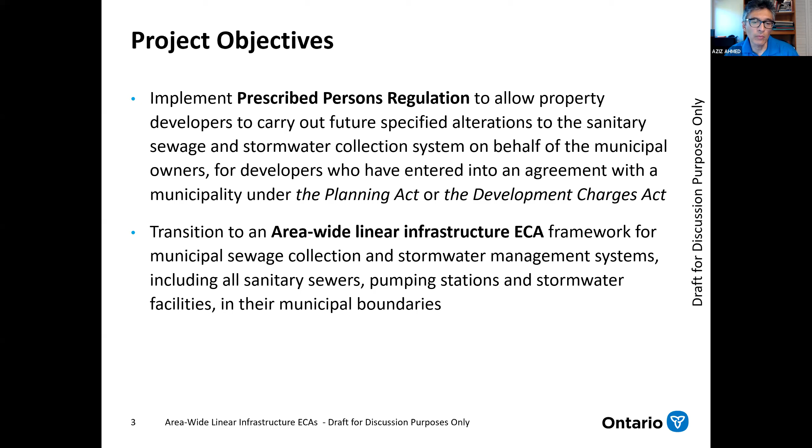The next thing we want to do is transition to a consolidated permissions framework. We call it the area-wide linear infrastructure, and this ECA would cover all of a municipality's sewage collection system in one ECA, and all of its stormwater management systems in another ECA, including all of those components located within a municipality's boundaries.

So we started working with a technical working group in 2018, composed of municipalities, major consultants, industry organizations, and ministry staff. At this time, we were really trying to consult about two things: design criteria for our most frequent ECAs that we saw applications for, which is the pipes, and wanting to move towards this consolidated permissions framework instead of the pipe by pipe, piece by piece approvals that we do now.

Fortunately, the ability of the ministry to authorize works into the future is already allowed by the Environmental Protection Act. Section 20.6 of the EPA allows the director to put terms and conditions having to do with future specified alterations in an ECA. That refers to alterations carried out by the owner of the ECA. It also allowed for alterations, extensions, etc., that are carried out by persons prescribed by regulations.

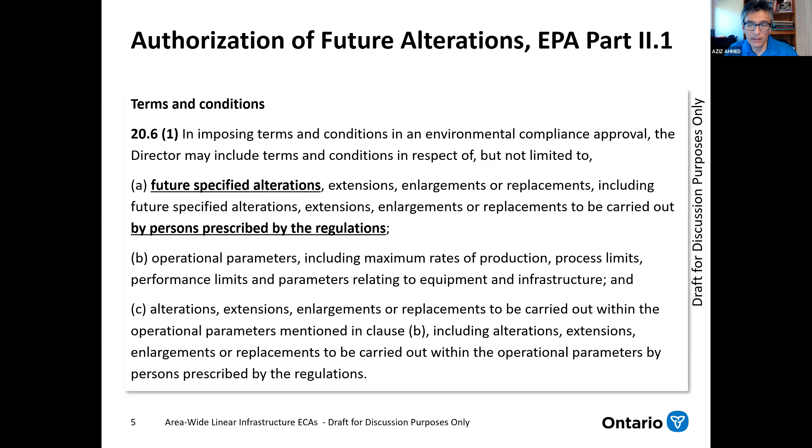And the persons prescribed by regulation were not in place until last year, even though this authority existed since 2012.

So the prescribed persons regulation, it's actually called the Environmental Compliance Approval in respect to sewage works. It was passed last year, and its purpose is to streamline the approvals requirements for constructing sanitary sewage collection and stormwater management systems, specifically that a municipality either owns or will own.

So prescribed persons such as developers can construct works under a municipality's ECA if they meet specific conditions, in which case they don't have to obtain their own ECA for that. The specific conditions are: one, meeting the sewer and force main design criteria, which is a ministry-developed document; and two, the owner complying with the conditions of pre-authorization that are in the ECA.

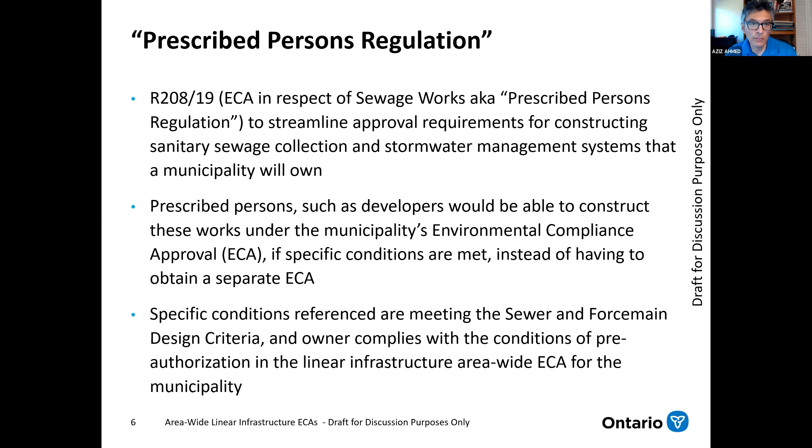So this area-wide or consolidated permission is modeled after what we already do in the municipal drinking water licensing program. For all of you in the industry, it's highly unlikely you have applied for an ECA for water distribution, like water mains, unless these are very large water mains. Those are all pre-authorized as part of the license.

We want to move towards this consolidated framework now for sewage collection and stormwater management. Some of you may be involved in the Municipal Transfer of Review program. This is a delegation of the ministry's review responsibility to some of our municipal partners, where they do the technical review on behalf of the ministry for developer-related applications, and recommend these to the ministry, which approves them without further technical review.

Another form of consolidated permission we've been issuing is a wastewater system-wide pilot. About 10 municipalities have these. Essentially, this is a consolidated permission for sewage collection and stormwater management works. Some essential features of this framework: it's a single permission for all interconnected works with the same owner, or works within the same municipality.

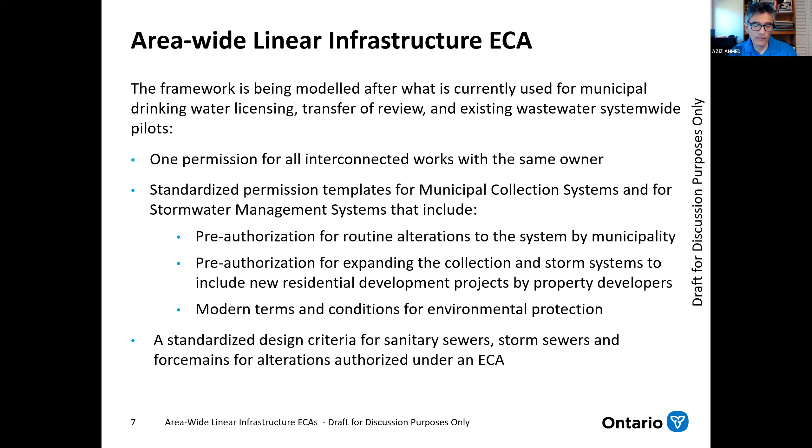Very importantly for us, it modernizes the terms and conditions for environmental protection from what's in ECAs right now, some of which date back to 1970, modernizing all of them collectively. To do this, it relies on standardized design criteria for the pipes, which would be pre-authorized if the design follows those requirements as conditions in the ECA.

The Prescribed Persons Regulation 208 is one of the key enablers we have, and it allows a developer who has an agreement with the municipality under the Planning Act or Development Charges Act to construct works that extend a municipality's infrastructure. The second enabler is this design standard for the pipes.

Now, both of these things by themselves don't do anything. But once incorporated into the conditions of the linear ECA, they become effective in the sense that this consolidated permission includes all of a municipality's own works, whether sewage collection pipes, pumping stations, et cetera, or stormwater management systems — all the pipes, the ponds, the LIDs, everything else that forms part of a municipality's stormwater system.

Specifically, the Prescribed Persons Regulation and the design criteria feed into a schedule in this proposed ECA, where the director has conditions which authorize either the municipality or these prescribed persons, who are property developers, to carry out alterations to the municipality's infrastructure. This allows us to avoid issuing about 700 to 800 approvals for property development related sewage works and stormwater management every year.

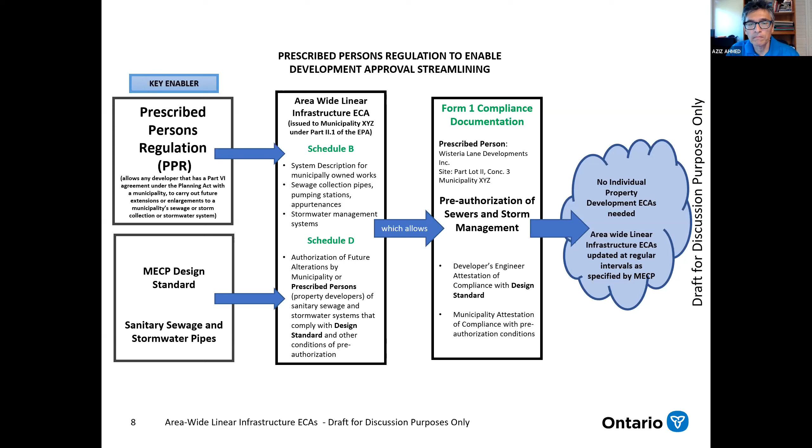The ministry would require that every regular time period, let's say 5 years, this linear ECA is updated through an application so that the terms and conditions are always kept up to date with our most modern environmental protection requirements. So the framework, as I mentioned, is very similar to municipal drinking water.

Take municipal drinking water — let's say the City of Toronto has one license and one permit for their entire system, which includes the intake, 4 major water treatment plants, and 5,000 kilometers of water mains within their boundaries. This potable water goes into residential developments, commercial and institutional buildings, and then some part of it comes out as sanitary sewage.

These developments, roads, etc., also generate stormwater. So our goal is that instead of the many thousands of approvals that may cover these works, we would have, again just like on the drinking water side, a single municipal sewage collection ECA and a single stormwater management ECA. The wastewater treatment plant would remain outside this consolidated permissions approach.

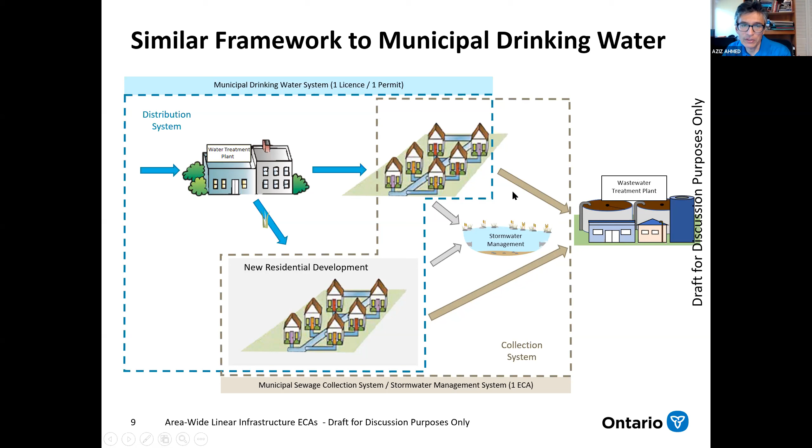So again, our approvals framework is fragmented. It's fragmented in terms of project by project, pipe by pipe. There's no really holistic way for us to view what the infrastructure is doing. City of Toronto, for instance, has 4,000 approvals we've issued to them.

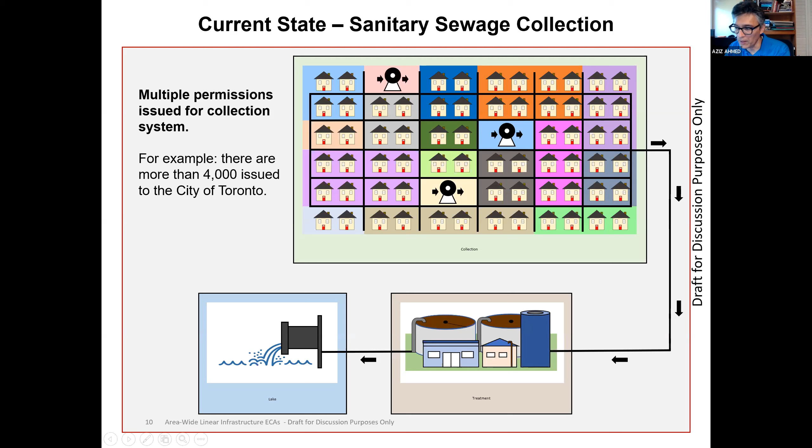So what we want to do is transition into this state where there's a single permission for the entire sewage collection system and one for the stormwater management system. And again, it's for the collection system only. The treatment plant and the outfall remain outside this framework.

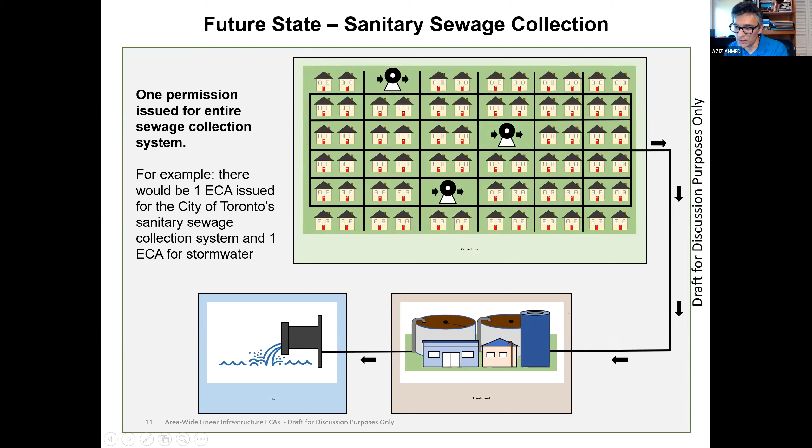And further, another way in which our approvals are fragmented is by media. So the Sewage Works approval includes wastewater and stormwater. Municipal sewage collection system has air emissions associated with it through odor control facilities, emergency generators, etc. Those are all covered in separate air and noise approvals. We want to include all of these things, regardless of media, into a single multimedia approval.

On the stormwater management side, there's really no air emissions, but there's waste generated. There's waste residuals from storm pond sediment from the collection system. We want to provide, within the authority of the ECA, the ability to dewater, physically process, and beneficially reuse the sediment, and perhaps deal with some of the generated process water by recycling that back up into the system.

An example: the Ministry of Transportation had a single pond project up at Mavis and 401. They were cleaning out the pond. The disposal cost for that sediment was going to be $2 million just for one pond.

We were able to work with them through a systems ECA, whereby they were able to reuse that sediment at a road project at Dixie and 401 to build noise berms. So again, a significant saving of taxpayer dollars, as well as a beneficial reuse of the material.

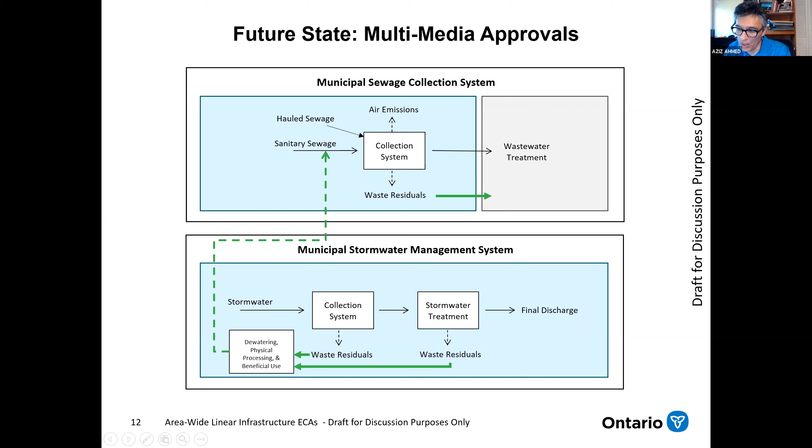And just to highlight, in that case, they weren't meeting the criteria in Table 1 of the excess soils regulation. We were able, through the ECA, to find this other way of dealing with that sediment.

Okay, so the design criteria, just to overview this, it covers sanitary sewers, force mains, storm sewers, and what we call third pipes. This establishes the minimum design requirements for an alteration to the conveyance system or the stormwater management system as one of the conditions they would have to satisfy to have these considered, as I said, pre-approved or pre-authorized.

If it's undertaken in accordance with the ECA and the design criteria, then no separate approval from the ministry is required because they're pre-approved. The difference between the design criteria and our existing wastewater system guidelines is that the design criteria is written in unambiguous compliance language as opposed to guideline language, and it makes it easier for consultants and designers to ascertain whether they comply with the requirements.

And municipalities can adopt standards that are higher than those in the design criteria. So this design criteria forms the floor, as it were, of the design.

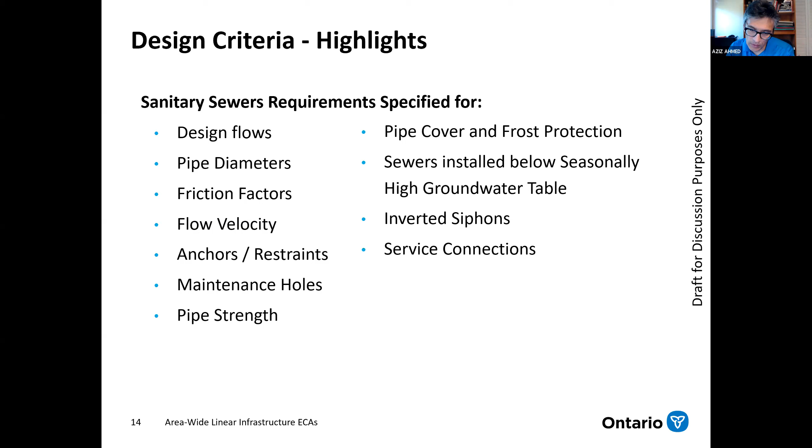Some of the things that the design criteria cover for sanitary sewers are design flows, friction factors, slopes, pipe cover, service connections - fairly standard design things, but again written in more detail to allow a designer to ascertain compliance.

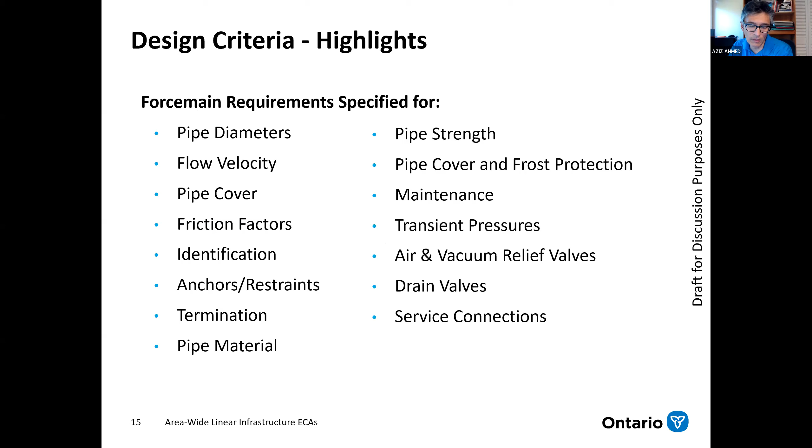And again, for force mains: flow velocities, friction factors, anchors and restraints, transient pressures. Those are some of the design criteria that are covered. I should add the full design criteria document is posted on the EBR registry, and I will provide you information at the end of this on where to access that.

And again, for storm sewers, different things like how to calculate the runoff, the pipe sizing, need for maintenance holes, inverted siphons, etc.

The design criteria also cover combined sewers, in the sense that while you can't install new combined sewers, we have pre-authorized the rehabilitation of existing combined sewers, as well as providing for the construction of CSO detention facilities of a certain size.

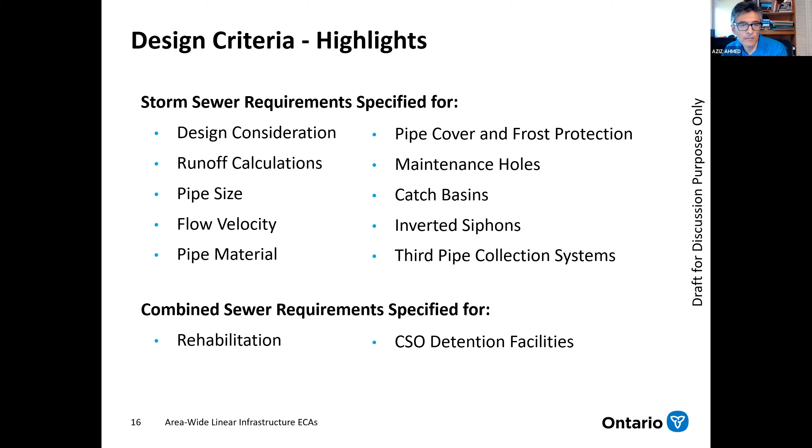One very important criteria that was brought to the attention of the ministry by the regional public works commissioners was the incidence of low or inadequate quality construction causing significant inflow and infiltration into sanitary sewers, eating up capacity at the sewage treatment plant, and causing environmental overflows into our water bodies.

Inspection and testing requirements have now been made mandatory for any pre-authorized work. There will be mandatory post-construction inspection and testing requirements with the goal primarily of reducing inflow and infiltration. Some of the requirements include mandatory video inspection of all new sewers and appurtenances, leak testing of sewers and force mains, mandatory deflection testing, and ensuring that if sewage and water infrastructure are located in close proximity, additional testing is done.

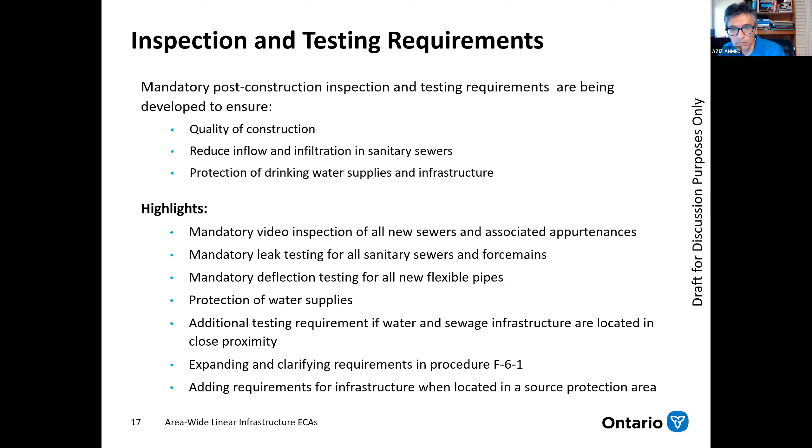So right now, if you get ECAs, this is an overview of what the new ECAs would look like. The ECA would be based on schedules. It looks like municipal drinking water licenses or permits, for those of you who are familiar with that.

There will be system information, like the boilerplate information about the system owner. Then there would be the system description of all the works that are in the ground, commissioned, and working for a municipality, whether they were constructed with or without an approval. Schedule D would have the conditions of pre-authorization, and Schedule E would have the operating conditions for that municipal sanitary sewage or stormwater collection system, and Schedule F will deal with residue management, which is the management of solid waste from that system.

If the works are not exempt from approval or not pre-authorized, in the future, instead of issuing separate ECAs for these, they would be issued as a schedule to the existing municipal ECA. This is the Schedule C document, which would authorize alterations that aren't pre-authorized, and it would form part of this, so that we would not issue the 10-digit ECA numbers as we do now. You would have one ECA number, highlighted there, that always remains the same. We think that'll make it much easier for record keeping purposes.

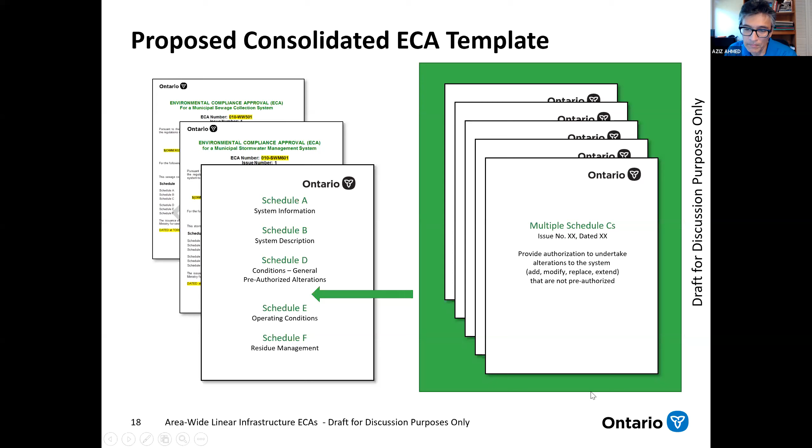In terms of system alterations, right now, if you have a new project that's not exempt, it needs to get an ECA. In the future, with this new framework in place, you'll ask: is it pre-authorized through a condition of an ECA? If it's not, you will apply for an amendment. There'll be a technical review, just as it's done right now. You will not receive a new ECA, you'll receive the Schedule C. Then you undertake the alterations, and then notify the director of completion through a ministry provided form. And then you're done. If there's a need to modify the description of the ECA, you'll receive that at some point in the future.

With pre-authorization, you now have a new path: you ask yourself, is this pre-authorized? If it is, then you complete a ministry supplied form for your records and undertake the alterations in accordance with the conditions of the ECA. If it changes the description of the system in the ECA, you notify the director again using a ministry supplied form, and then you're done and back at the same place. This ECA will be updated, the consolidated ECA, at least once every 5 years.

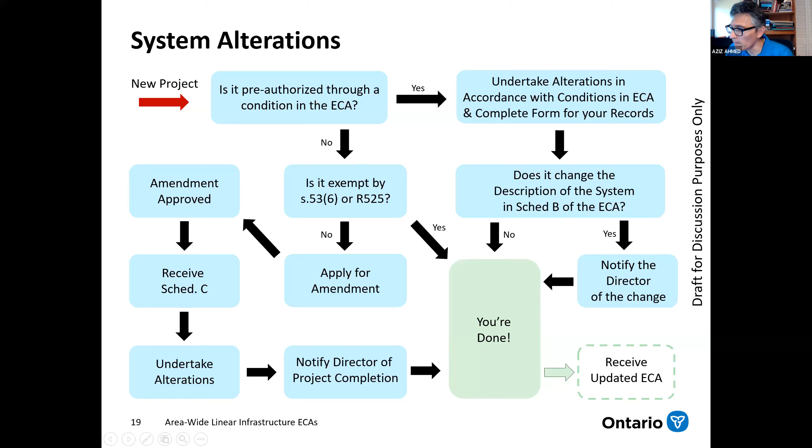Okay, so again, the ECA templates in general, I won't belabor this because you can go and take a look at the templates in detail on the EBR registry. But here are the standard requirements that they will have. It's very similar to current ECAs, except you have to remember now it applies—there's one ECA for an entire municipality, and these requirements apply to all of them.

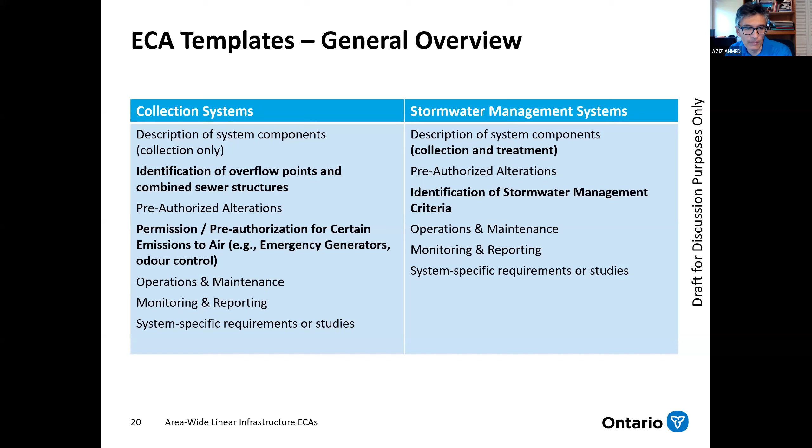Again, some of the key highlights of the collection system ECA: it describes all of the components that are in the ground owned by a municipality, or for which the municipality is the beneficial owner, in the sense that the works are going to be built and transferred to their ownership. It describes all system components and references a separate document, basically a schematic of all the sewers, as well as the pumping stations and storage tanks that are part of that collection system. It specifically identifies overflow points and combined sewer structures.

The pre-authorization conditions allow for the alteration or extension of sewers and force mains. It also allows for like-for-like replacement of existing combined sewers based upon having a pollution prevention control plan. It also has its multimedia, including equipment with emissions to the air, etc.

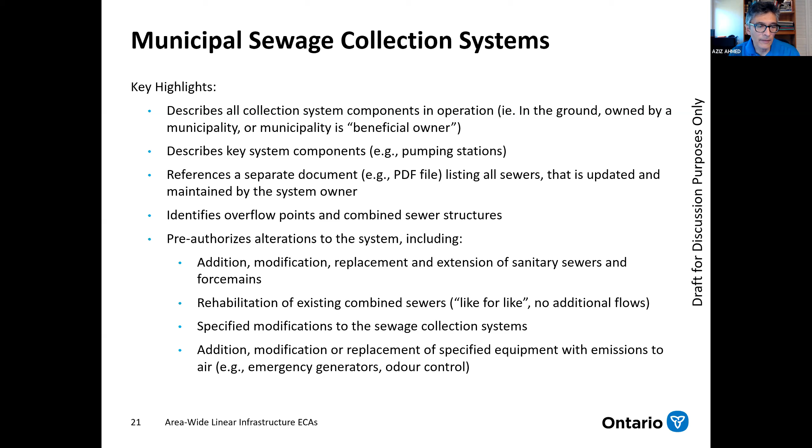I'll just move on to the sanitary, the municipal stormwater system. Again, it's the same kind of thing in terms of describing all of the stormwater infrastructure, aside from the very large regional flood control ponds.

It pre-authorizes alterations, which include storm sewers. It also includes really everything with regard to stormwater management, ponds, LIDs, green infrastructure, based on the conditions of the ECA. And you have to take a look at the ECA template to get more details about this.

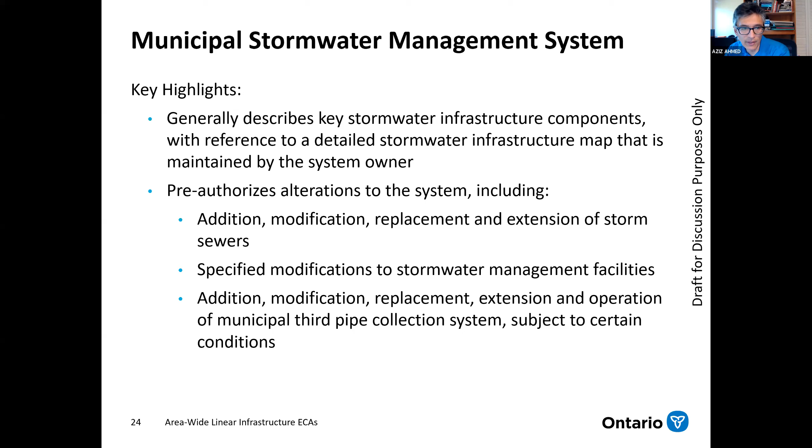It also talks about a third pipe system. These third pipe systems are essentially a communal system for the collection of relatively clean roof runoff or foundation drainage for the purposes of reuse primarily. Again, this is covered in the design criteria and the conditions of the ECA. So again, the third pipe is for reuse.

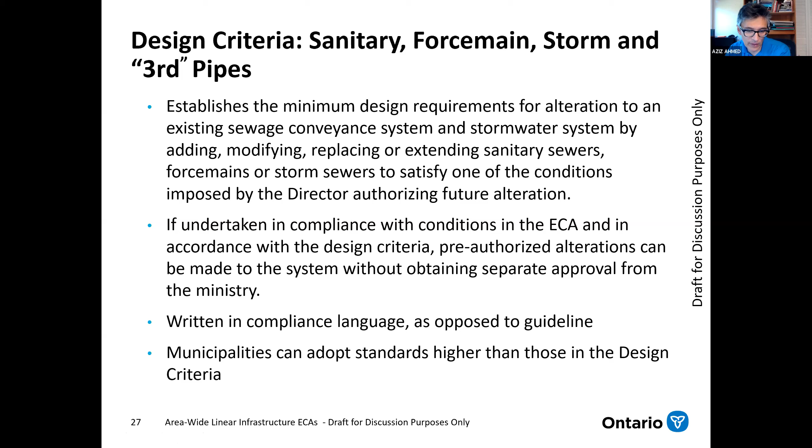I've mentioned that municipalities can adopt higher standards than those in the design criteria. Again, if the design doesn't meet the design criteria, it doesn't mean that it's unapprovable. It just means it's not pre-authorized. You need to get an ECA amendment for it, kind of like the way you get ECAs right now.

So in terms of the next steps and timing, there's an EBR consultation taking place on this proposal. That's the ERO reference number 019-1080. You can access this on the environmental registry and get all of the documents. The posting of this proposal closes on September 6th, so you still have time to get us comments.

If you're interested in commenting on the ECA template and the design criteria, we have line numbered versions of the templates and design criteria, and we're asking that you use the MS Word commenting feature to provide us comments, because it allows us to compile the comments in a reasonable period of time. That's the email address, mdwlp@ontario.ca, and you can request the line numbered version. If you don't want the line numbered versions, all of the documents can be found on the EBR posting.

And with that, that's my name and contact information. I'll ask Enrico whether we should stop to take questions on this right now, or if I should launch into the Watermain Disinfection Procedure.

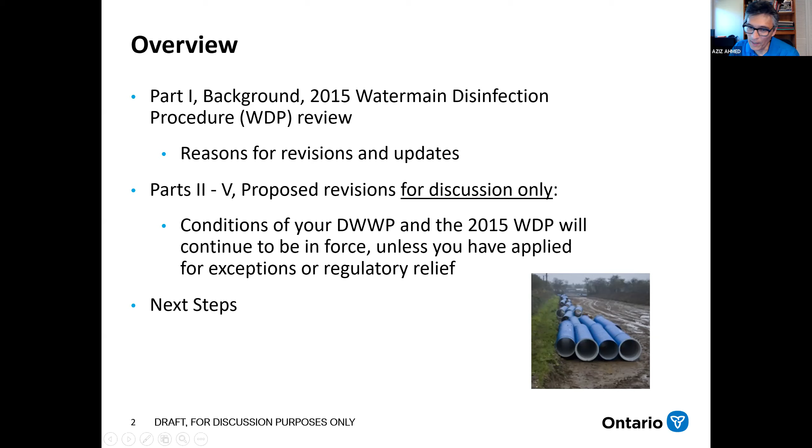For those of you who don't do a lot of work in the water main break world, this was one of those things that was a bit of a best management practice prior to the issuance of the first licenses and permits in 2008. After that time, compliance with the AWWA standard C651 became a mandatory condition of the municipal drinking water license.

One of the problems we had was that the document was very ambiguous in terms of being able to be used as a compliance document, and there were things in there that just kind of tended to contradict each other. So we were fortunate at the time, shortly after we issued the licenses and permits, that we became aware of this Water Research Foundation Project 4307.

It was led by Greg Kirmeyer and Mark LeChevallier, in which they basically looked at the risk factors of various types of water main breaks, and they worked with 29 American and 1 UK utility to come up with these. They were looking to see what risk factors can be used to determine public health risks, and they categorize risks into type 1s, which have the least potential for contaminating a water supply, all the way up to type 4 where there's a risk of contaminant intrusion. Happily, the procedures in type 1, 2, and 3 were almost identical in terms of response.

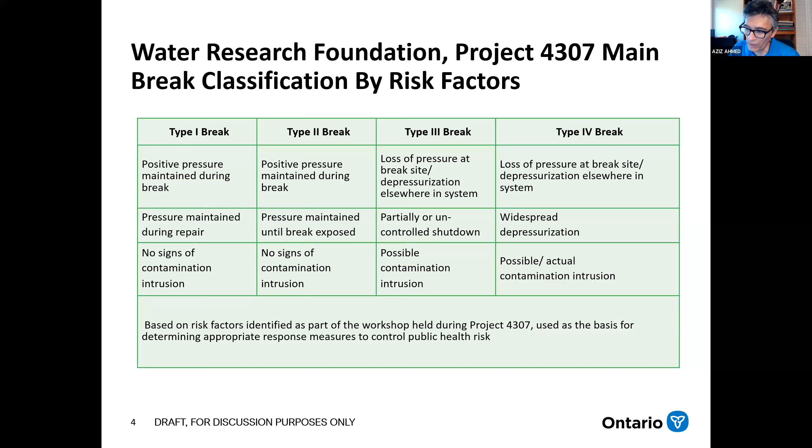So we were able to actually do a refinement to that when we implemented our version of C651 for Ontario system owners. The focus of the 2015 Watermain Disinfection Procedure, AWWA C651, deals with

installation or routine installation of water mains, as well as emergency repairs for breaks. So really the focus of our 2015 document was with regards to main breaks, and so we came up with our own categorization of water main breaks based on the risk of contamination.

There was a requirement that an operator in charge be there at the break to determine the category and document their reasons. It has procedures for agency notification and reporting, observations of improper disinfection, as is required under the Safe Drinking Water Act, Schedule 16.

There were also water main break procedures, which regardless of the type of break needed to be followed, and then obviously documentation of the break, for future inspection purposes.

One of the things we realized early on is that if the water main remained pressurized during the break and throughout the excavation until pressure was reduced, it's highly unlikely that potentially contaminated water was directed to users. That was very helpful for a lot of public health units as well as ministry staff.

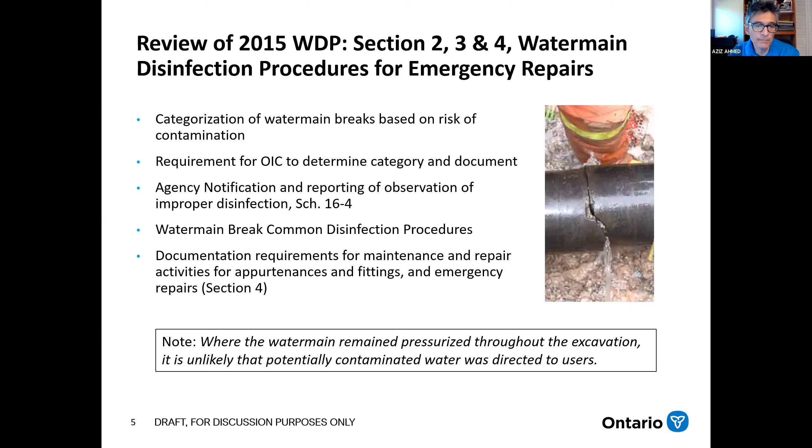So in our 2015 document, we categorized main breaks based on risk of contamination, both before and after flow reduction. Category 1: there's no evident or suspected contamination. You can look at the picture on your right, and yep, certainly water's flowing out, but doesn't appear to be any contamination. Category 2: there is evident or suspected contamination. You can see there's a wide blowout there of that pipe, and we also categorized any repair that needed more than 6 meters of replaced pipe, more than one standard pipe length, as a category 2.

One of the things we did is make sure that it wasn't considered an observation of improper disinfection just because you had a water main break. Only if you had reason to believe that improperly disinfected water was distributed to users would the requirements for reporting and corrective actions under Regulation 170 be followed.

We also clarified that just because you have a main break, you don't automatically have to report that to the ministry. The only time you have to report it is if there's a water advisory that's been declared, or if it's a special case of contamination that's either chemical or sewage in nature. We also clarified that for Category 1 main breaks, microbiological samples were not necessary.

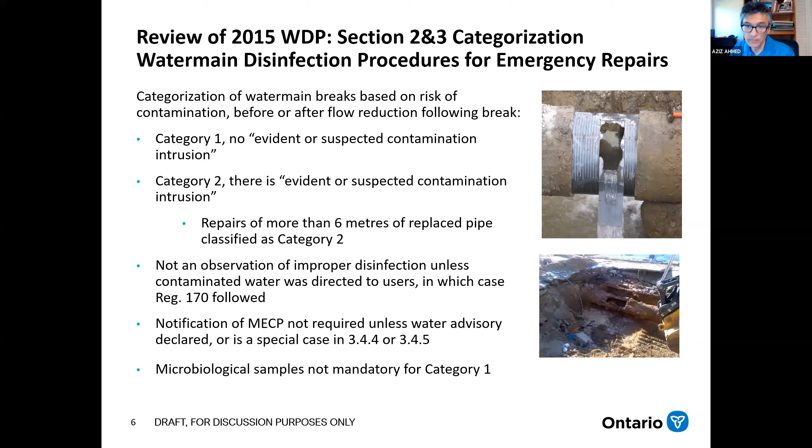After we issued the 2015 document, we received, up until about 2018, about 64 separate issues, requirements for clarification, or opportunities for identified changes to that document.

As I mentioned, the focus of the previous document was on water main breaks and emergency repairs. We did a pretty good job of covering those off, but the proposed revisions were more focused on new water main construction and replacement.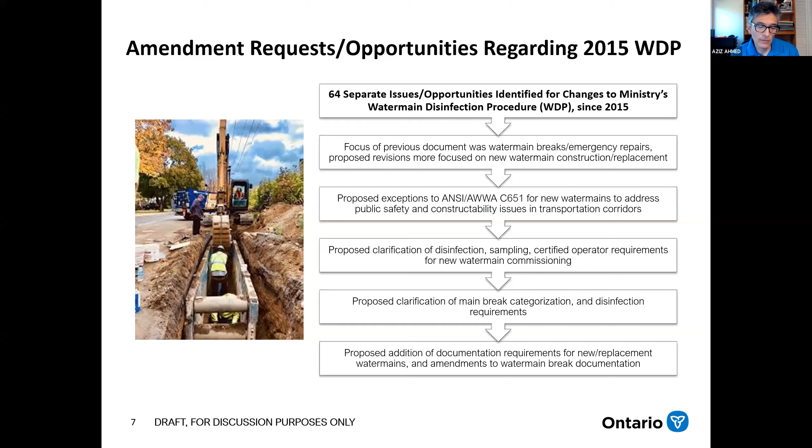There were also issues raised with regards to new water mains being constructed and where following C651 was causing public safety and constructability issues. There's proposed clarifications for the disinfection, sampling, certified operator requirements when commissioning new water mains. There was also requested clarification for some of the main break categorization and disinfection requirements, and of course the need to add additional documentation requirements.

I don't know if any of you had a chance to participate in our working group, but this group put together the 2015 document, and they were called back to help us revise this document again.

We don't have a lot of time, so I won't get into this in detail because the document is available for anybody who wants a copy of it.

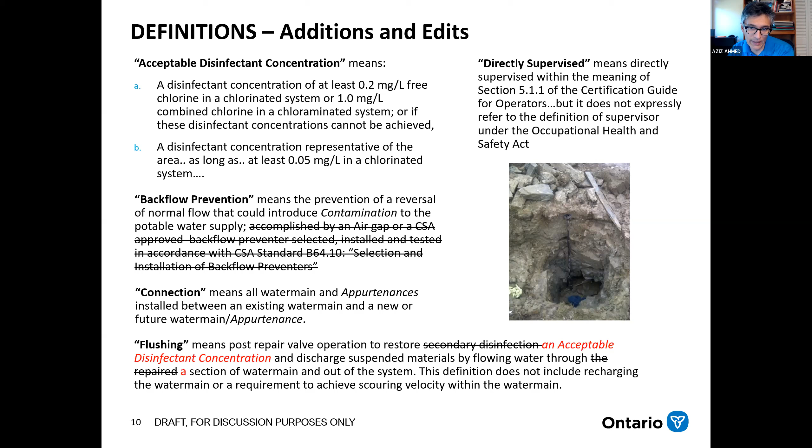We made certain changes to the existing definitions in the document, including clarifying what is an acceptable disinfectant concentration, redefining backflow prevention to clarify its requirements, defining connections, which we did not before, as well as defining flushing to clarify some of those requirements. And also addressing the issue of direct supervision for the purposes of our ECA, our license, and the requirements under the Occupational Health and Safety Act.

The standard C651 applies to all water main additions, replacements, extensions. It also applies to temporary water mains, and it applies to service pipes greater than or equal to 100 millimeters in diameter.

We provide certain exceptions: exceptions to backflow prevention in 4.8.9 of C651, exceptions to scouring velocities, and exceptions for disinfection procedures where water mains or service connections are crossing transportation corridors.

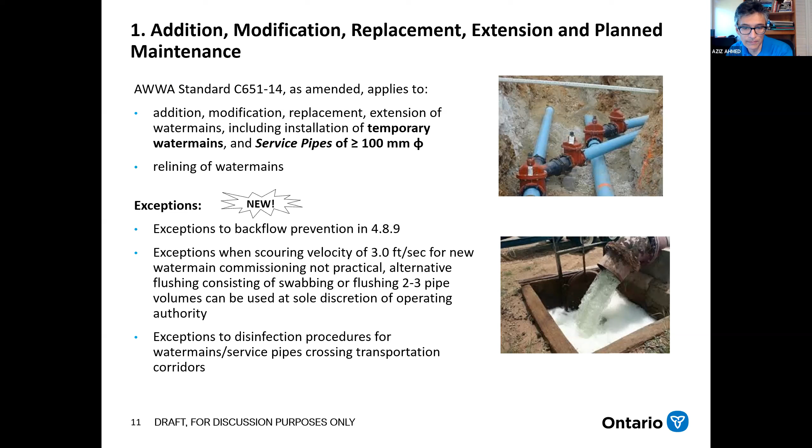There's now language in there about the use of hydrants to supply temporary water mains. That was, for some reason, something people thought couldn't be done. We've made sure that we have included language in there for that.

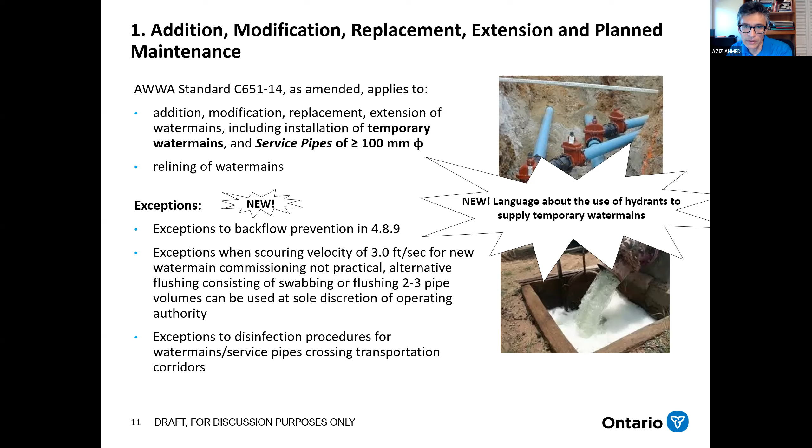Just one thing, please be aware that C651 requires that the new water main be isolated using physical separation until a satisfactory bacteriological testing result has been completed.

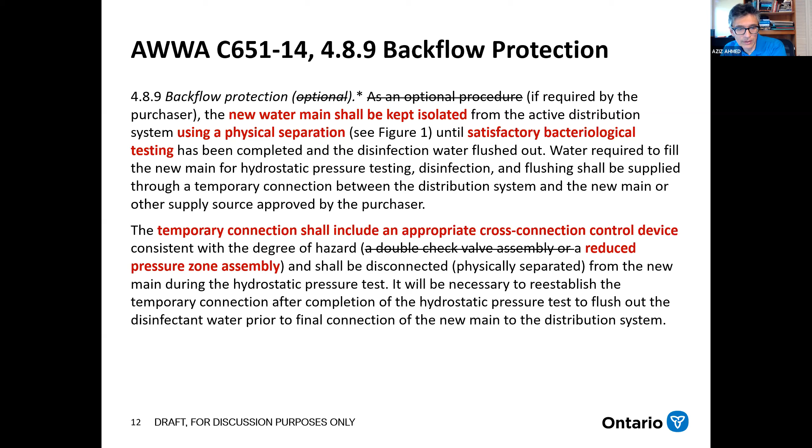The temporary connection has to include an appropriate cross-connection control device. In our case, we're not allowing double check valve assemblies anymore because they can't be tested on site. Only a reduced pressure zone assembly will be allowed.

So as I mentioned, backflow prevention is a requirement for installing new water mains, and the two recognized methods are air gaps and a reduced pressure backflow preventer.

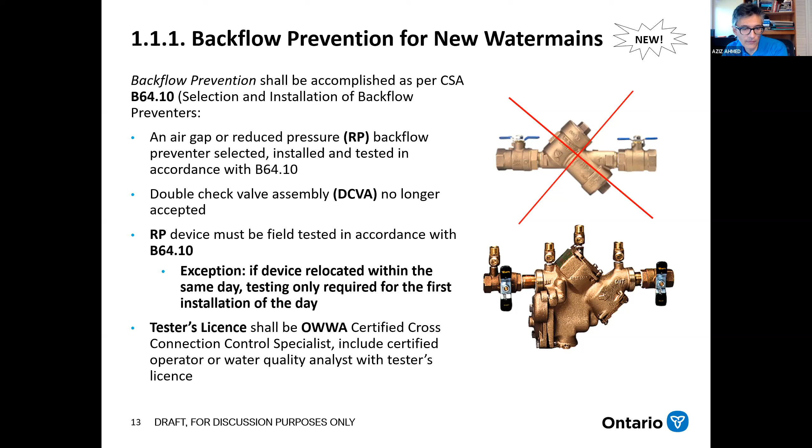And the RP device must be field tested in accordance with B64.10, at every site except for where the device is being relocated within the same day. And the tester's requirement is an OWWA certified cross-connection control specialist license.

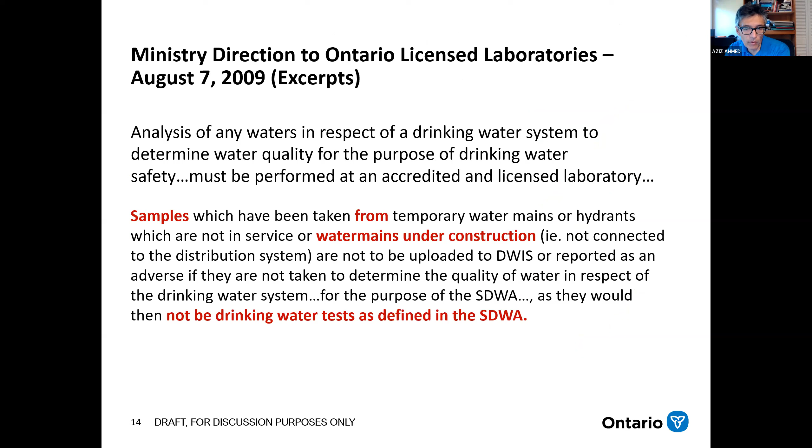One of the things that we clarified previously on August 7th is that samples taken from water mains under construction are not drinking water tests as defined under the SDWA. Therefore, you don't need to report these as adverse test results if they come back negative.

So there was microbiological samples for new water mains. Obviously this microsampling needs to be done, and it must be done at a licensed and accredited laboratory. Samples taken prior to final connection are not drinking water tests, and so they're not reportable.

We've clarified for connections to new water mains that we are providing exceptions in the case where these connections are more than one pipe length from some of the disinfection requirements. And backflow prevention measures within section 4.8.9 are not mandatory for connections.

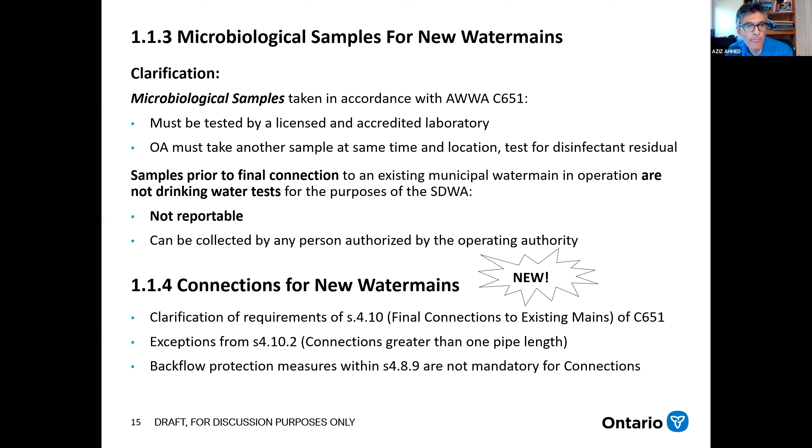So for final connections, for connections equal to or less than one pipe length, the disinfection procedure is that this may be spray disinfected or swabbed just before being installed, and if that's the case, that's acceptable.

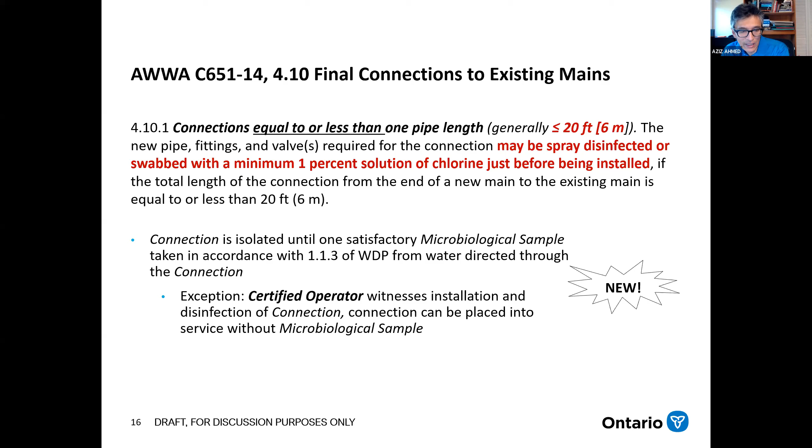One microsample has to be taken in accordance with the Watermain Disinfection Procedure. There's an exception where if the certified operator witnesses the installation and the disinfection, the connection can be placed into service without the microsample. For connections greater than pipe length, there's a very detailed procedure where this must be set up above ground, disinfected, and bacteriological samples taken.

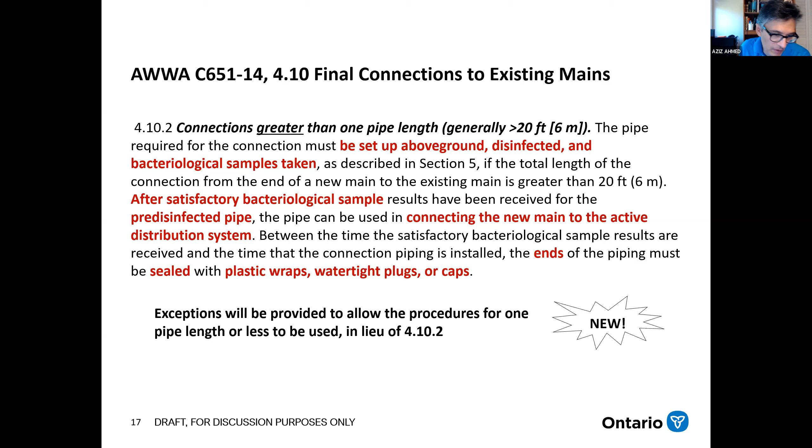And after satisfactory bacteriological samples have been obtained, then the entire assembly is lowered into the ground. This is quite onerous, especially when crossing transportation corridors, and so we've allowed for exceptions to this.

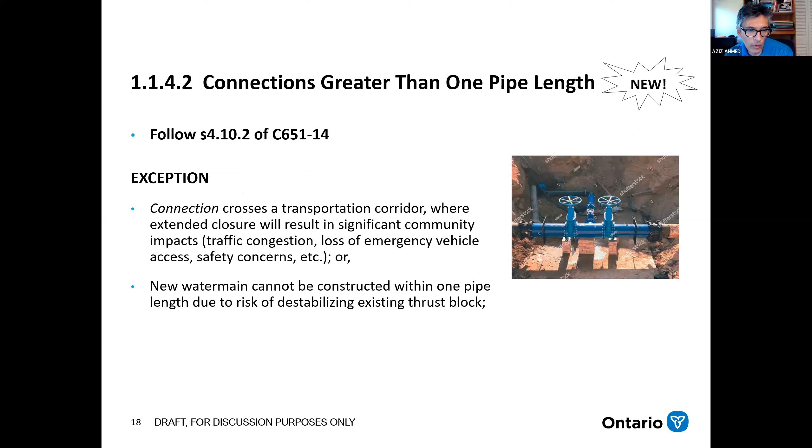The exception is that you can follow the procedure if it's greater than one pipe length, but if it's crossing a transportation corridor where the extended closure would result in significant community impacts, we would allow this water main to be disinfected using the procedures in 4.10-1, which is the one for single or less than one pipe length.

Connections greater than one pipe length, up to a total length of 40 meters, may be constructed within the excavation and disinfected similar to one pipe length if the following conditions are met: it's disinfected, spray disinfected, or swabbed, and a certified operator witnesses the installation.

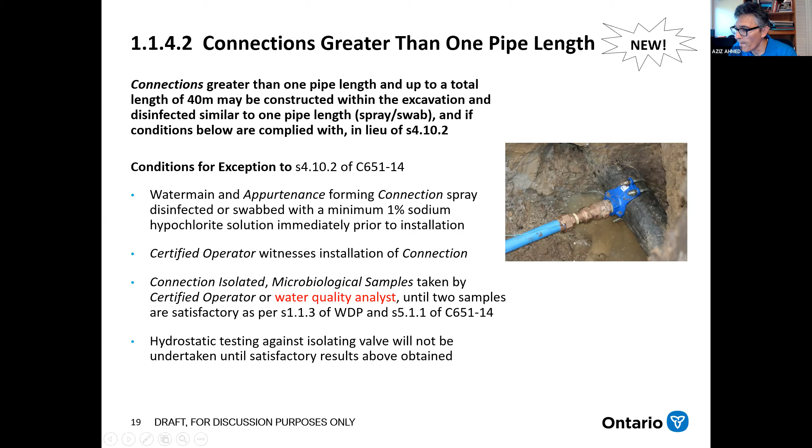So we have also included clarification of certified operator requirements.

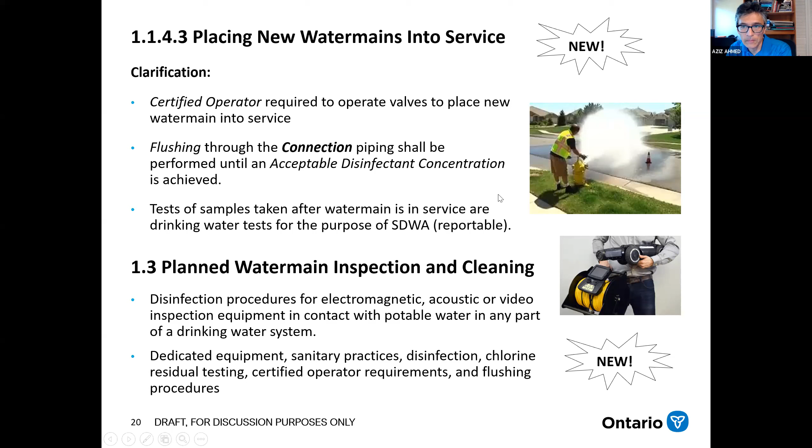We have a lot of inspection and cleaning of water mains that takes place. Some of the inspections happen while the water main is still in operation. So we have provided disinfection procedures for things like video inspection equipment that's in contact with potable water in the drinking water system.

We have also provided procedures for where an existing water main needs to be realigned on the spot, and what type of disinfection procedures need to be followed. Sometimes that's done when you're installing other infrastructure, like network equipment, gas mains, etc.

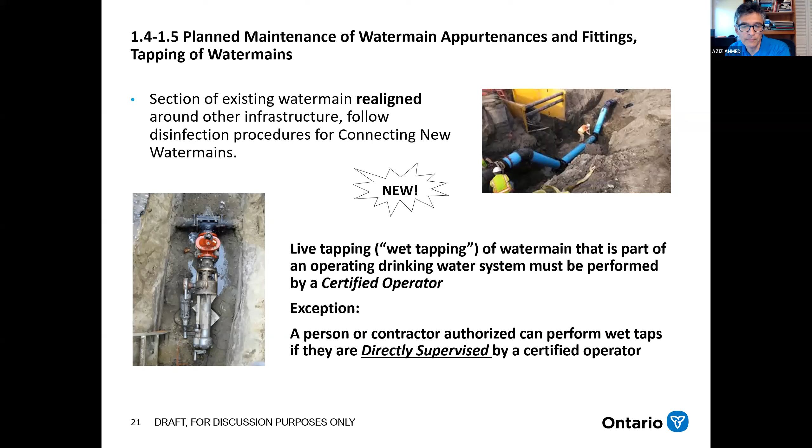Again, clarifying that whatever requirement applies for water mains also applies to service pipes greater than 100 millimeters in diameter. And this exception from disinfection requirements also applies to service connections.

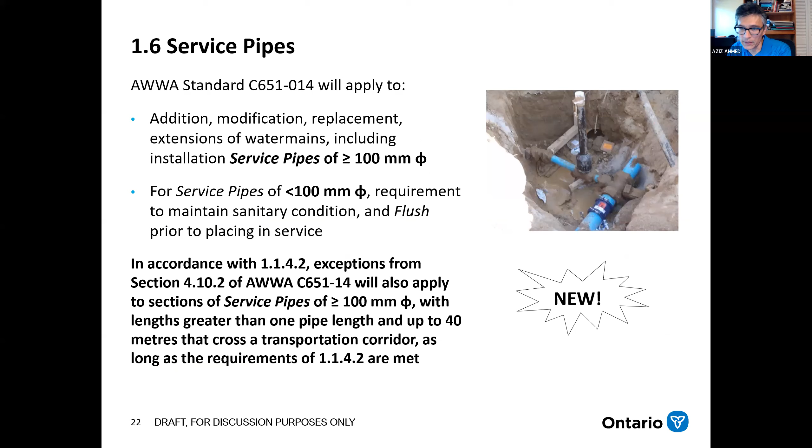And we've clarified requirements for how to recommission a water main that has been isolated from the distribution system for an extended period of time, such that the disinfectant residual was not maintained.

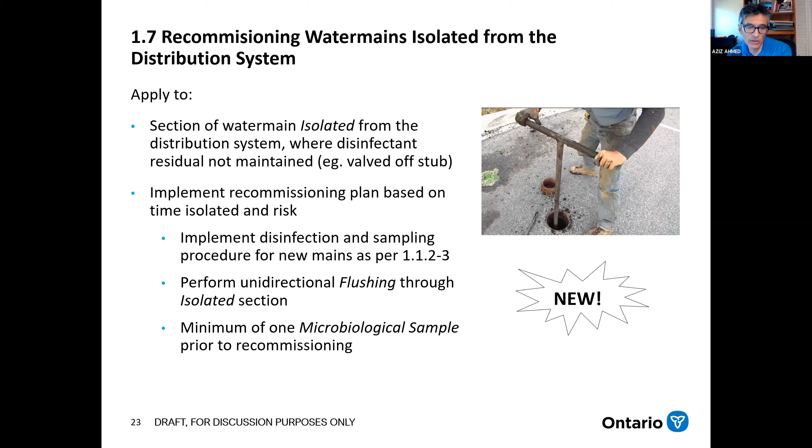In terms of the emergency break procedures, everything is being maintained in terms of the categorization as it was. The only change now is that every break will be classified as a category 2, evident or suspected contamination, and the procedures for that are followed unless the OIC conducts a visual examination and concludes that it's a category 1.

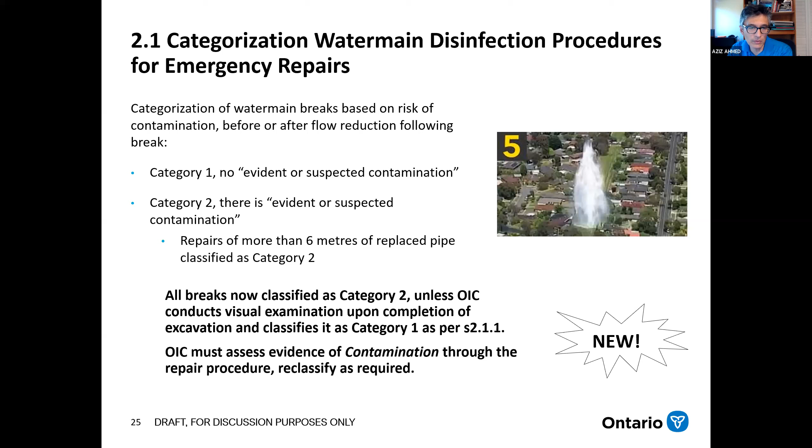So that's a bit of a change in the procedure, which we think will make things a little bit simpler for municipalities.

And in terms of the documentation requirement, the big addition is now the documentation requirements. Instead of just applying for water main breaks, it will also apply to new water mains and planned replacement.

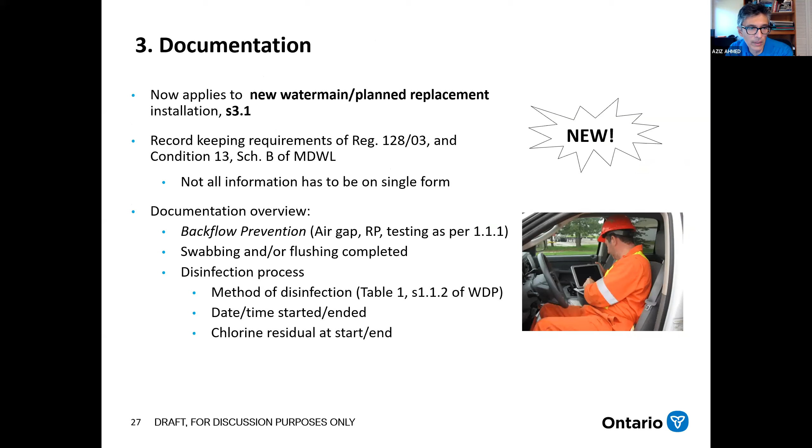So again, all of this information is available to you through the ministry.

Just in terms of the next steps, we revised the document and provided it to stakeholders for comment in 2018. We have now finalized all of the comments, and the new version of the Watermain Disinfection Procedure has been issued. It's dated August 1st of this year.

The implementation of the new procedure is through the license renewals that municipal owners are going through right now. There's also an option for early adoption of the procedure for those who want to use some of the flexibility in the revised procedure earlier than their license allows. And we'll continue to work with municipalities to provide them with interpretation and advice on the new procedure.

So that's it for me. Does anybody have any questions?